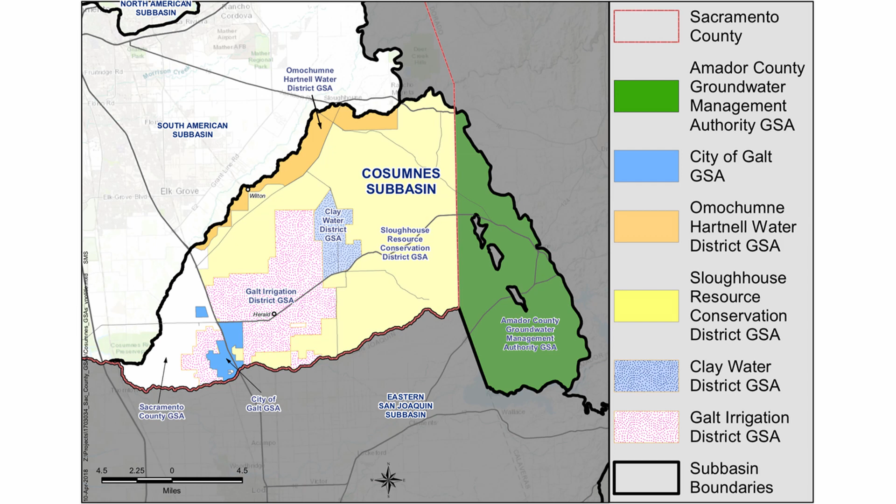All right, well, it's a big topic, and there's some tension in trying not to rely on things like technical jargon and so forth, and at the same time trying to give information that's available and meaningful to a broad-based audience. So I hope we succeeded on this. This is based on some of the preliminary stuff like Tom's interviews and various conversations and so forth.

Talk a little bit about the adaptability of a model once you have one for the future and maintenance and so forth. And then to talk a little bit about the available models and applications for this basin, for the Cosumnes Subbasin.

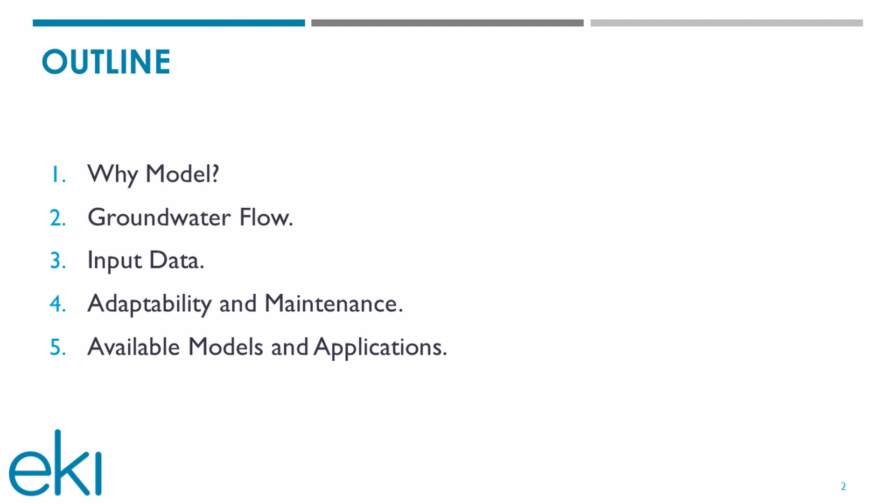So first off, it'd be good to talk about what models can and can't do, because for a lot of people they're just a black box, and they can also be a source of great suspicion. And basically, models are used to quantify groundwater conditions. Okay, and that's a concept that is important for us to get across. The real power in the room is this. It's still this. It's what's in here. But a model is a way to take from what's in here and to put it down and to quantify it in a very unbiased way.

So if you have a mistake up here, your model won't work, no matter what you try to do to it. But it also helps you keep honest, because a lot of times people can be developing a model or running it, and it doesn't give them the answer they want, and so they begin to think it's wrong. And usually it's not that the model's wrong, it's usually the person that's building it that's wrong.

But specifically, what the model does is it quantifies water levels, the level of the water in the aquifers beneath land surface. And because it quantifies the water levels, it also gives us information on the direction of groundwater flow and the rate of that flow. And then finally, with that information, it also tells us how much water is stored and what the changes in that storage are. So you can see they're very useful, because not only can they help you understand what's going on now, but they can also help you make best guess projections of the future.

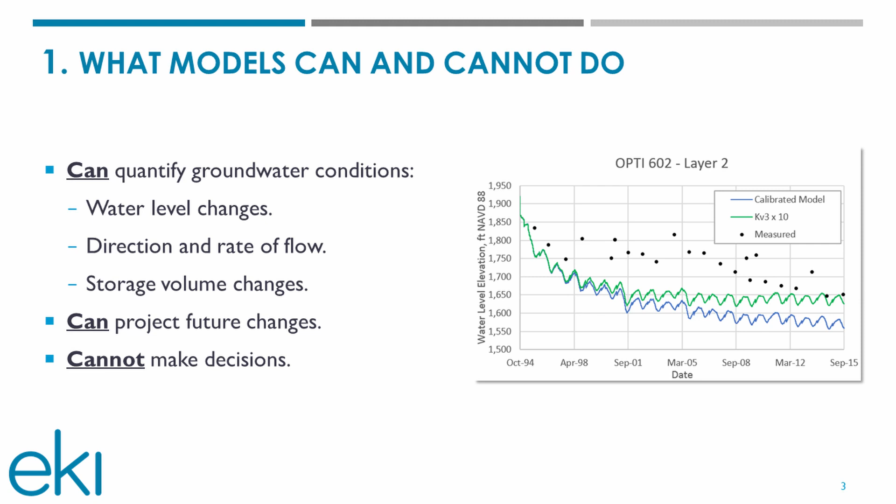Why is a model used or needed for this process, for the groundwater sustainability plan? Well, specifically, we're required to develop quantitative information on current conditions, and we're also required, as part of our planning process, to be able to project what the conditions will be 50 years into the future.

And that projection can be based on things that aren't in our control, like climate change. Or it can be things like projects that any entity wants to develop as a means to develop a more reliable water supply and to look at the effectiveness of the projects over time.

Specifically, we are asked to develop not only information currently, but projected on what they call the cones of depression, and that's where if you have a lot of pumping and you're dewatering the aquifer, you get what looks like an inverted ice cream cone. Or it can be over a much larger area where you have a number of wells pumping, and they're all making their own little ice cream cones, and the open part of the cone starts growing, and then they start connecting, and so it gets even bigger.

So it's always additive. In a groundwater system, anybody who's taking out water, it all becomes additive with everybody else. Nobody is an island to himself. It's also important in terms of the depth of water because it can affect things like the pumping lifts. The depth of water can also affect whether your well, which is basically fixed in space, whether the water level falls beneath the screen in the well, and so forth.

We're also required to develop that same information on current and projected future conditions, what we call a water budget, which is a compilation of inflows and outflows. Just like a bank account, you have your income coming in and your bills going out, and the balance of your checkbook is what you have in storage. And we're required to calculate that for the resource that's beneath the ground and that we can't see. And so that's why you need a model.

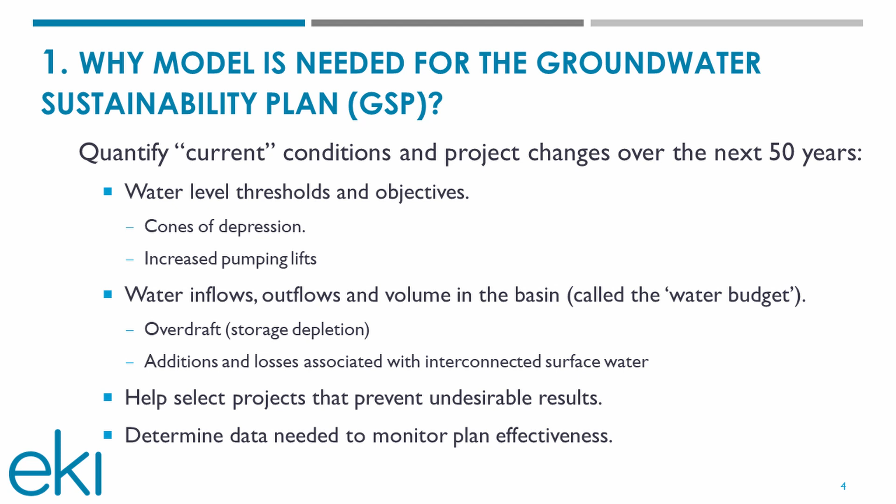And so I have a little video here that Kat and the Water Forum helped me splice together, but it's an introductory video on just the basics of groundwater flow.

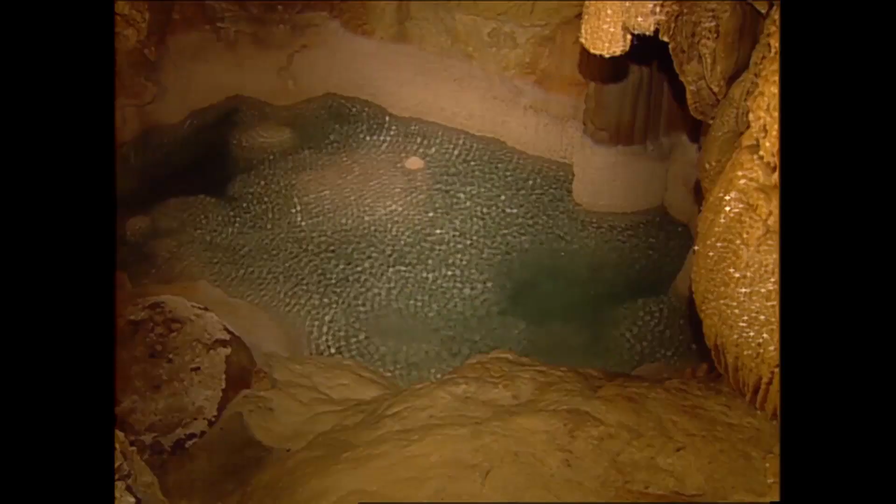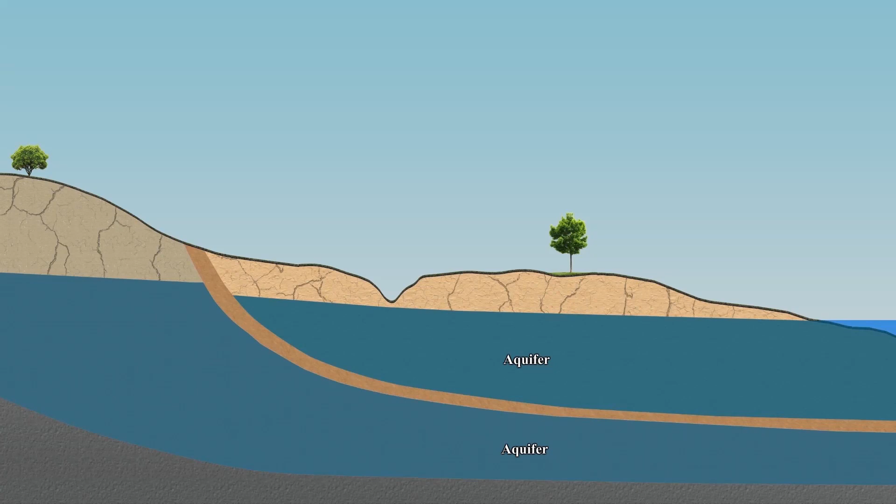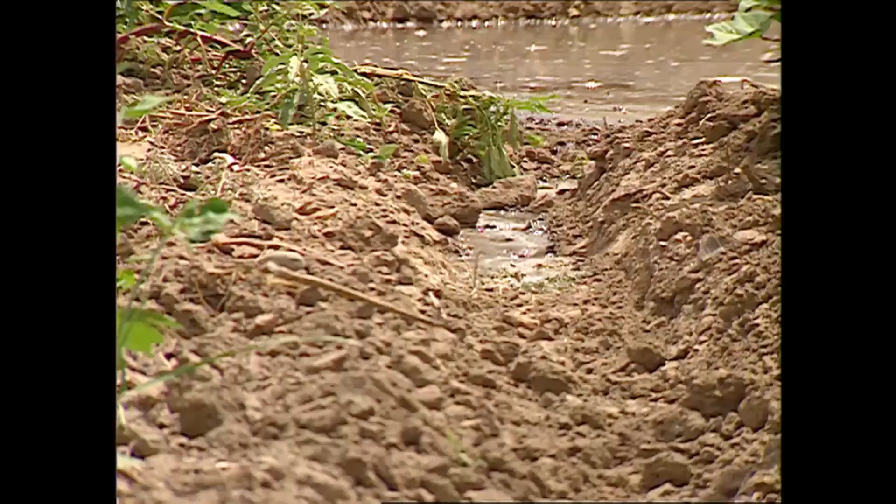Aquifers are rarely underground lakes like you might see in a cave. They are typically rock formations that are mostly solid, but like sponges, they have interconnected fissures and pore spaces that hold water and allow it to move within the formation. An aquifer is best defined as a layer of saturated rock and the water in its pores. Aquifers are formed very slowly over vast periods of time. Water in aquifers comes originally from the surface of the earth. When rain falls, some of the water infiltrates underground and collects in the pore spaces. Water in rivers and lakes can also seep into the subsurface pores. Eventually, some interconnected pore spaces become saturated with water. In other words, they become an aquifer.

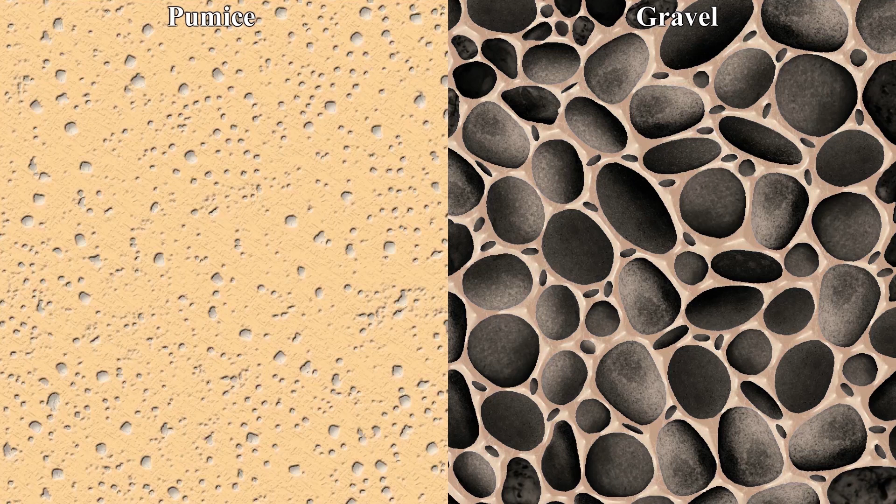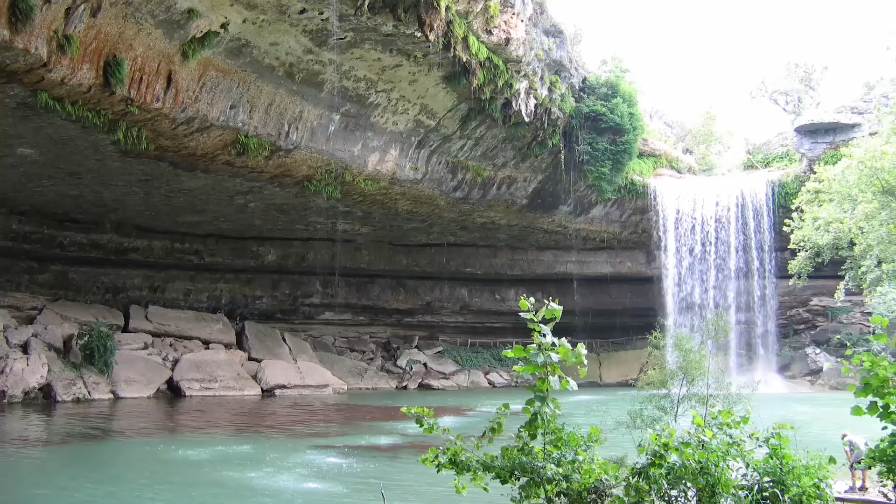The ability of an aquifer to produce water depends on the properties of the aquifer's rock formation. The two most important properties are porosity and permeability. The porosity is a measure of the volume of empty space, or pore spaces, inside the rock. Pore spaces can be openings between grains, fractures in the rock, and even caverns. Porosity represents the volume of water a rock formation can hold. Porosity itself isn't enough to create an aquifer. The areas filled with water must connect with each other so the water can flow from one pore space to another. That connectivity between pores is known as permeability.

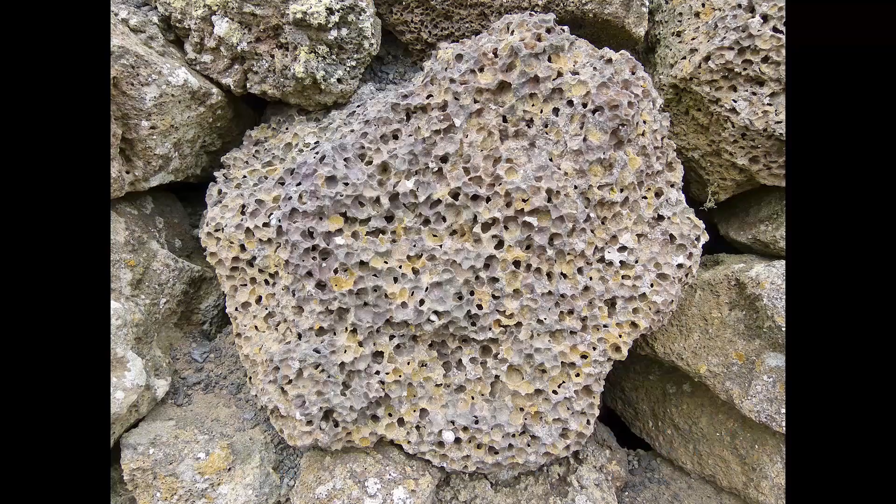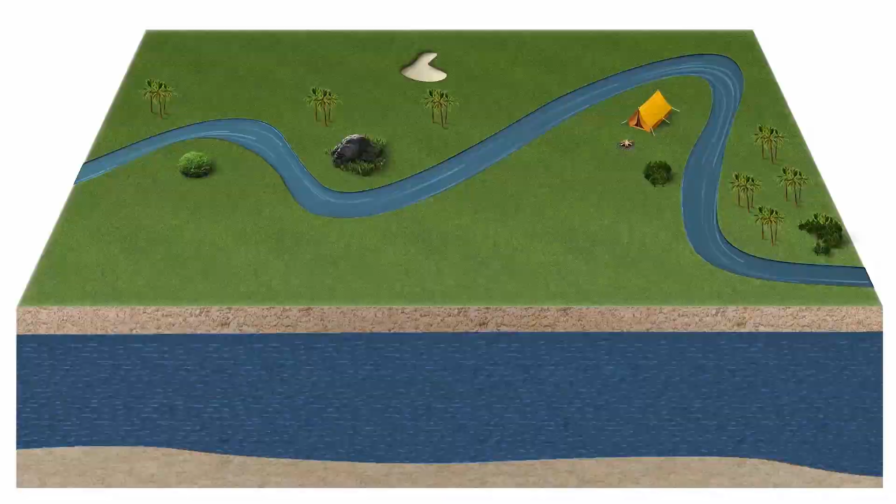Permeability is a measure of how readily water can flow within the rock. Rocks such as pumice and shale can have high porosity, but do not form productive aquifers because the pores within the rock are not connected. The permeability of pumice and shale is low. On the other hand, gravel transmits water quickly because of large connected pore spaces. The permeability of gravel is high. Compared to water movement through rivers or lakes, the rate of movement through an aquifer is slow.

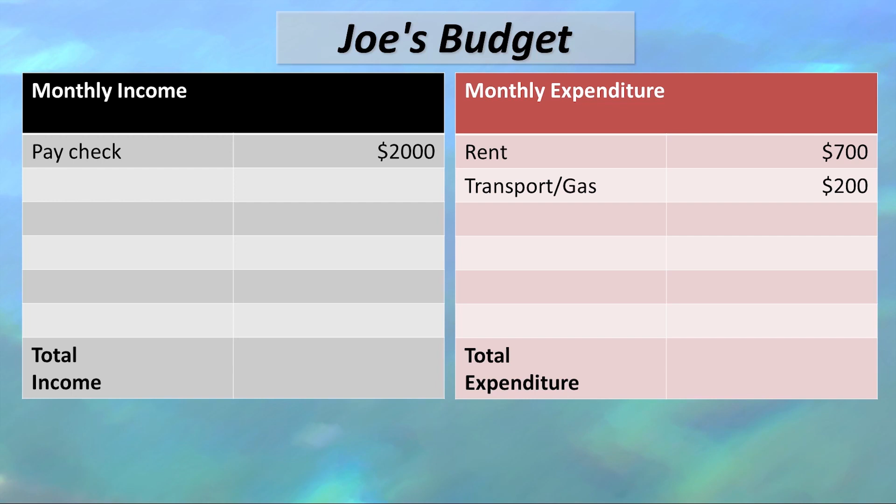Managing groundwater is the same as managing any budget. A household cannot continuously spend more money than it earns. In the same way, an aquifer cannot continuously give more water than it is taking in.

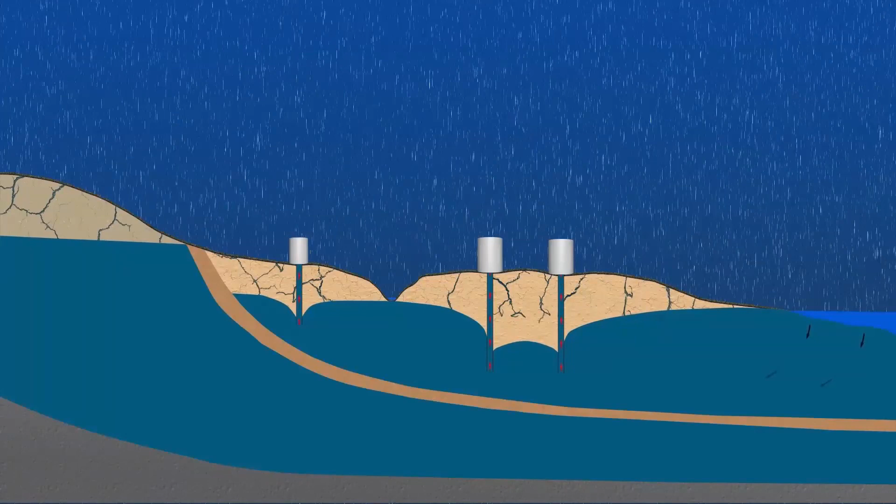Accounting for the groundwater budget requires thinking about the water cycle. The water cycle is the continuous movement of water on, above, and below the surface of the earth. Water that enters an aquifer from the surface is called recharge. Recharge includes rainwater that seeps down through the soil to reach the water table. Only a small portion of total precipitation gets down this far.

Recharge also includes water draining into the aquifer from streams and lakes. Water that enters from another aquifer is called inflow. Inflows and recharge are comparable to a deposit in a bank account. They add to the overall wealth of an aquifer.

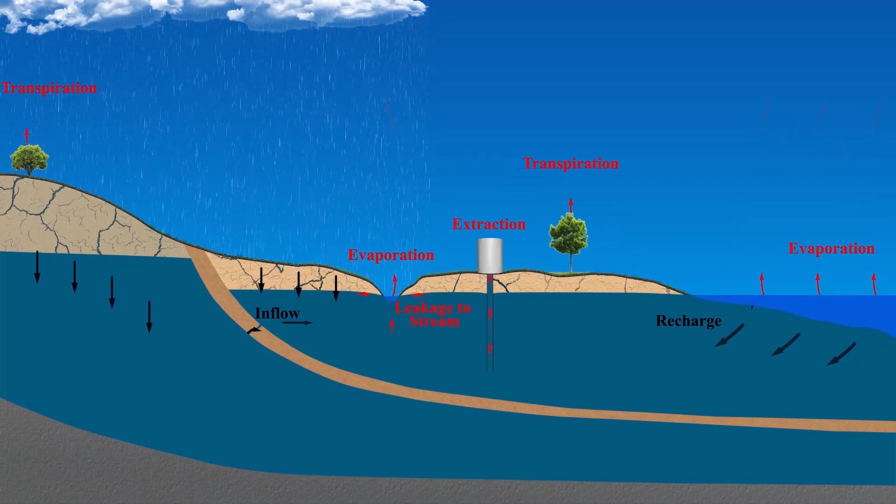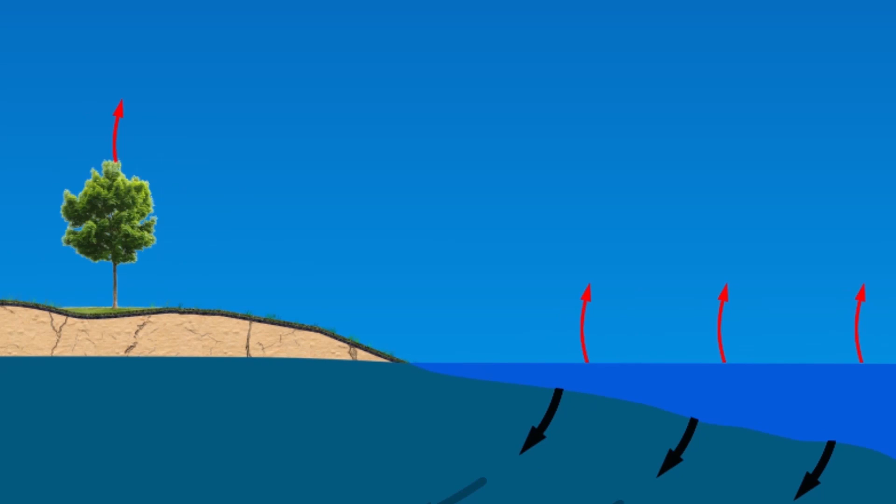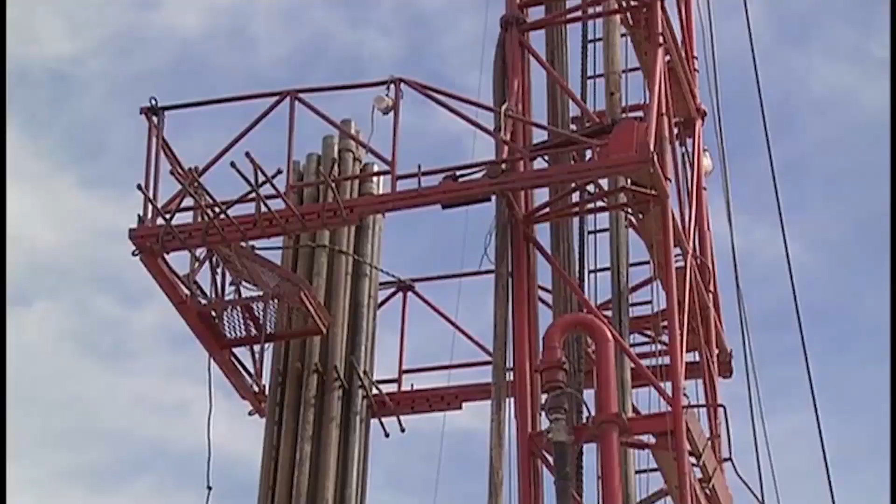Water exiting an aquifer naturally or artificially is called discharge. Examples of naturally occurring discharge are evaporation, groundwater used by plants, springs, leakage into streams or lakes, and leakage from one aquifer to another. The most common discharge from an aquifer by humans is pumping. Discharge is comparable to a withdrawal from a bank account.

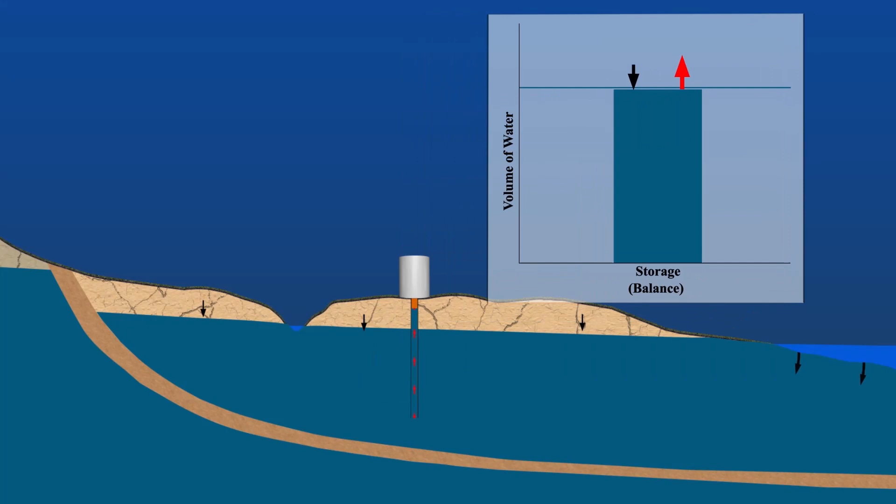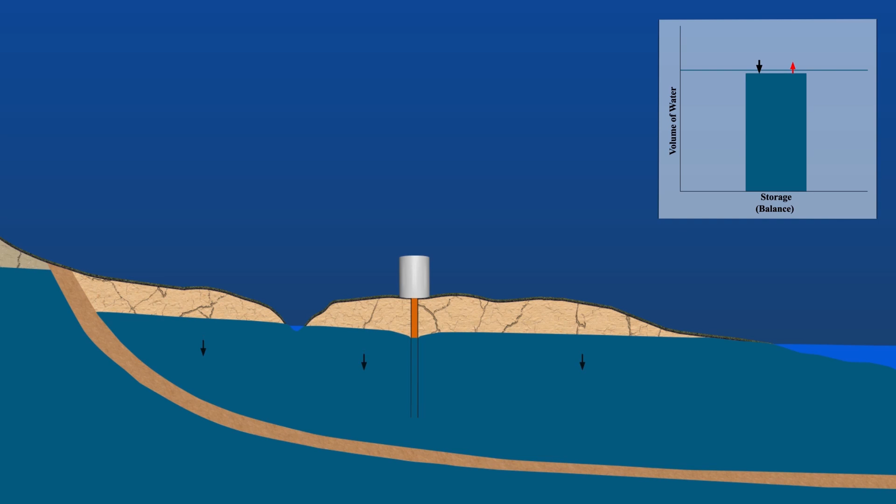The amount of water inside an aquifer is called storage. This is comparable to a balance in a bank account. Anytime we pump water from an aquifer, we are drawing down the water level in the aquifer storage. As long as the amount of inflows can replace what we pump, drawdown is temporary and does not affect water availability. When inflows can't keep up with pumping, we are depleting the aquifer.

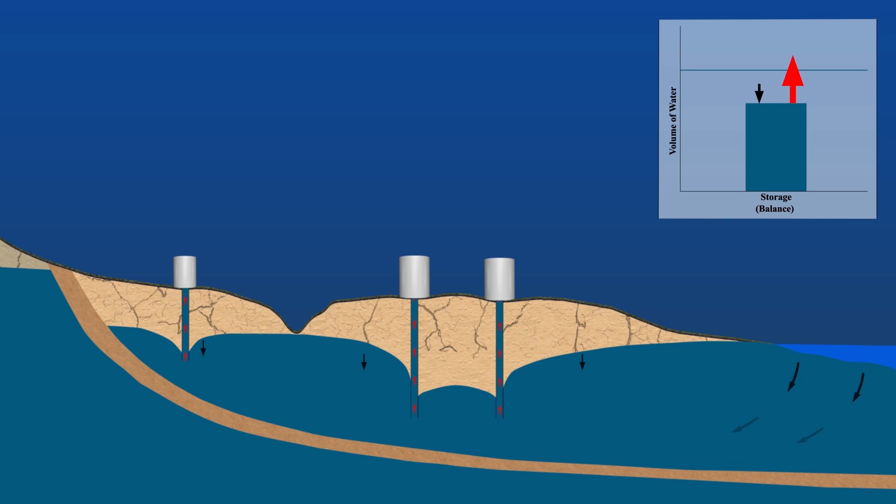Prolonged pumping in excess of inflows reduces the amount of water in the aquifer, and as a result, pumping becomes more difficult and costly, as water must be lifted from increasing depths.

Okay, so that's some of the basics behind groundwater flow and groundwater systems. And one of the things I wanted to talk about first is this whole thing. Sometimes you'll hear them talk about an HCM or a hydrogeological conceptual model, and all that is, it's the understanding that we have up here of what's going on out there. And so if you can think of this as being sort of like the Cosumnes Subbasin, you have all kinds of things that are going on.

First, you have a structure of what your groundwater basin is like, and what I'm talking about is the aquifers. And so, like in this diagram, it's showing that it's not just one big homogeneous or uniform piece of material. There's variability. There's clay beds that don't transmit a lot of water, but they can impede the movement of water between two different water-bearing zones.

You also have things that are going on on the land surface that have an incredible amount of effect on what's going on beneath it in terms of the water use and the water that gets back into the system. You can have surface water, groundwater interactions that occur along creeks and streams and so forth. You have wells that can be pumping from variable depths in different water-bearing zones. And then just the variety of land uses and the amount of activities that go on that consume the groundwater.

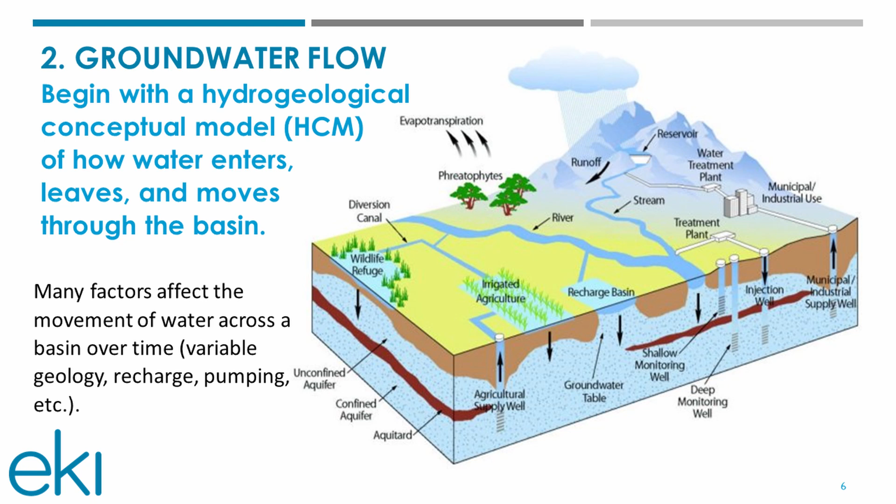One of those concepts is that, you know, it's an aquifer. You can kind of think of it like a sponge. It's not a perfect analogy, but it does have a lot of similarities in that it stores water. We all are familiar with a sponge. If you put it in a bowl of water and you let it absorb to its full capacity, you can pull it up and it'll be draining under gravity.

And that's just like in an aquifer with a water table. It can be draining under gravity if there's a place that the water can go to. And then you get to a point where it doesn't drain anymore, but that doesn't mean it's devoid of water. You can squeeze it and get more water out of it.

And unfortunately, when that happens in basins that have what they call unconsolidated sediments, meaning that they're like sand, silts, clays, and so forth, and under certain other conditions, you can actually have a situation where by lowering the water levels, the burden from the overlying soils and everything that's on the land surface starts to compress those fine-grained clays just like a sponge, and it'll squeeze water out, a lot of water. But unfortunately, the land surface sinks, and that's what they call subsidence, and you can't get it to come back.

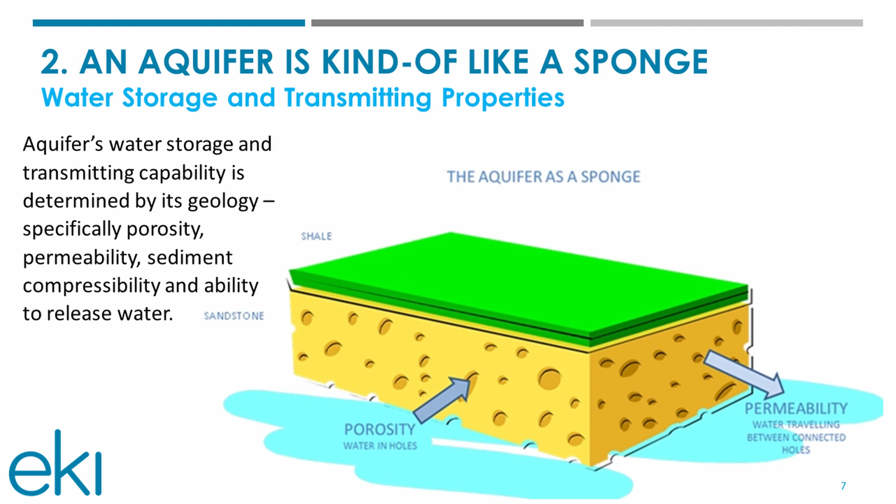Okay? And then finally, the other point that is important, and they did a good job of that in the video, is the relationship between porosity and permeability or hydraulic connectivity. Just because you have a material like a clay that can have a lot of water in it, it doesn't have the same connectivity. It's much more difficult for the water to move along the various paths than the water that would be in like a gravel. Okay, so those are important. So even though you have something that can have a lot of water in it, it doesn't necessarily mean that the water is accessible.

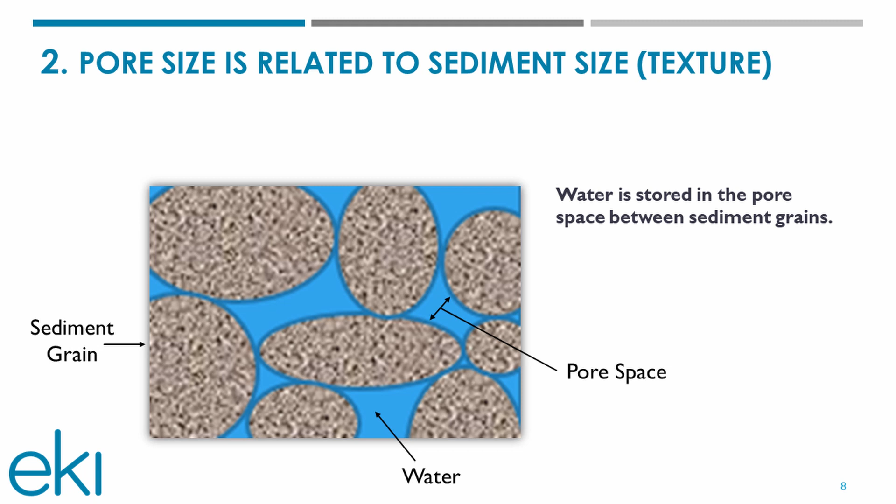And then this is another slide just to emphasize that point, is that what we're really talking about in terms of groundwater movement is the amount of water that is actually in between the individual grains. Whatever those grains represent, whether it's boulders or sand or clay, it's whatever is between those solids. It's the water that's within those pores, and then it's the movement of the water through the pores that results in groundwater flow.

I just had another thought and it escaped me.

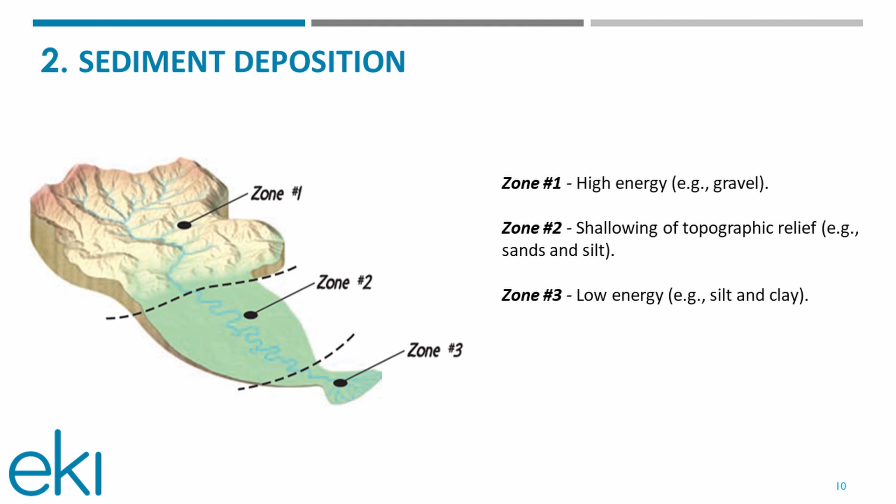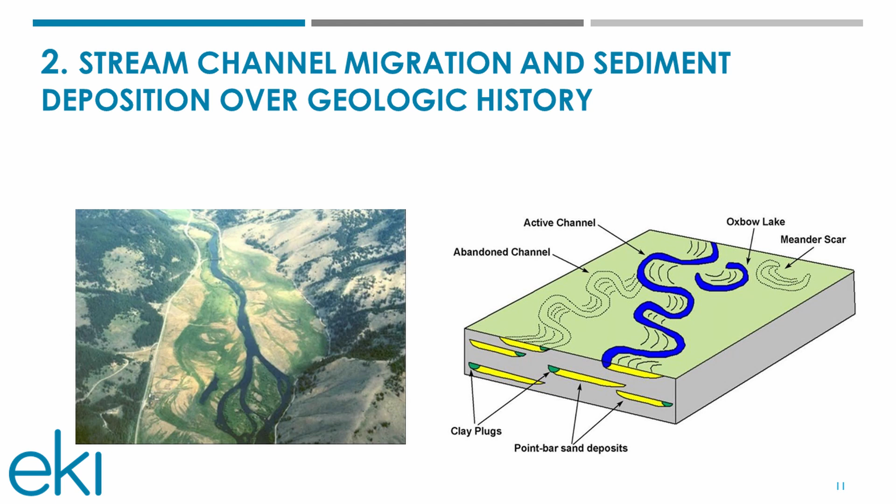This is just a continuation of the concept I was talking about in terms of deposition of sediments. What we're showing here is how over time, when you have these streams meandering, they can also change courses. And you can see the patterns in here of the old stream channels. And it's really important that over time, with depth, you can see that these were old stream channels at earlier points in time. As the stream moves, they start getting the fine-grained deposits laid down beside them. So you get what they call buried stream channels.

And in fact, you can see some of the properties in here where you can still see the green up here, which is probably indicative of the topography being a little bit lower and the water table being a little bit shallower, as opposed to the other areas where you may have higher topography and a deeper water table.

But the real important message in all this is that in dealing with a basin like this, the term I always like to rely on is that they're called messy aquifers. Okay, there's just no rhyme or reason really. It's very difficult to quantify this channel here, this channel there, this depth here, and this depth here. There's just too much going on. There are tools to try to reduce that uncertainty, but it's really difficult to map this out like you would a plumbing system, where you know where the pipes are and where the water's going. This is much more complex.

How would you characterize the Cosumnes Basin? Are we down into that meandering portion of the lower valley? You have almost all of it. So we've got a messy aquifer. Yeah.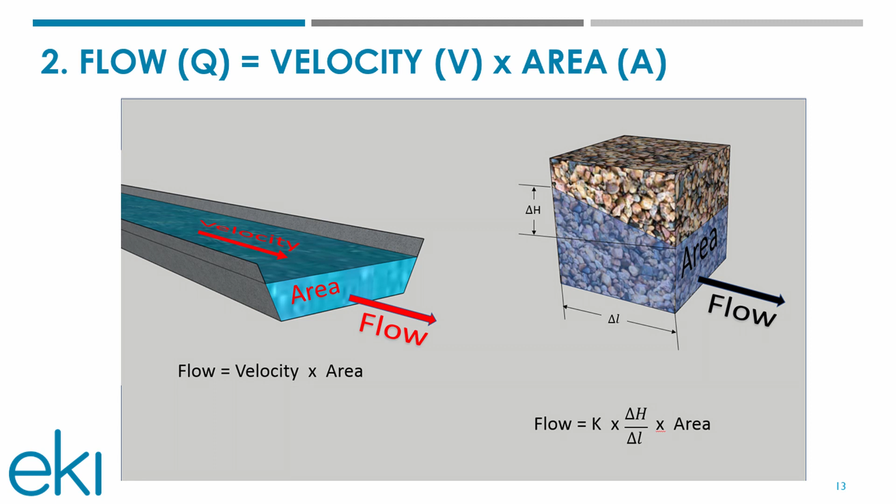And so this is what is driving the flow. This is its ability to transmit the flow, and this is the area of the flow, and it gives you the flow that you're after. And we're going to talk some more about this. In fact, I even have a video here. It might be nerdy, but I liked it because it just shows you that people really do

measure this stuff, and also because we can't see the water flowing underneath us. We can go out and see signs of it sometimes. We have a seepage face along a road cut or along the bank of a river, but we can't see it flowing through the soil. But you can actually see that, oh yeah, it does come through a chunk of soil.

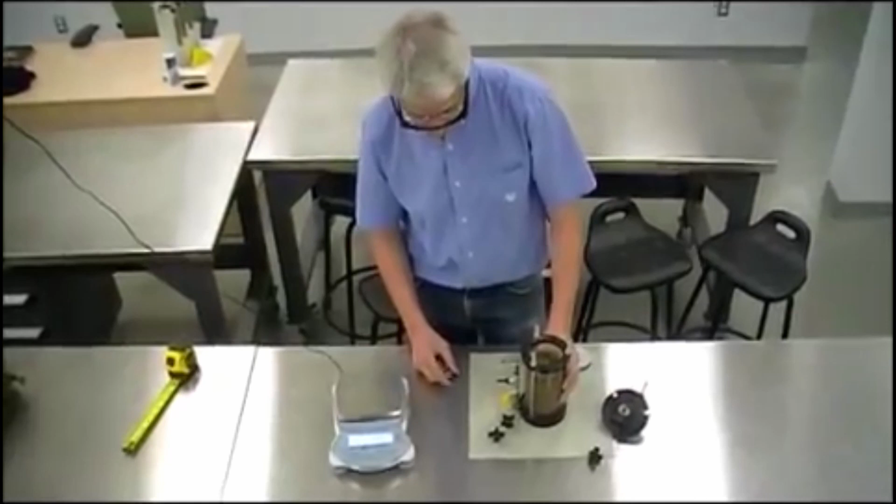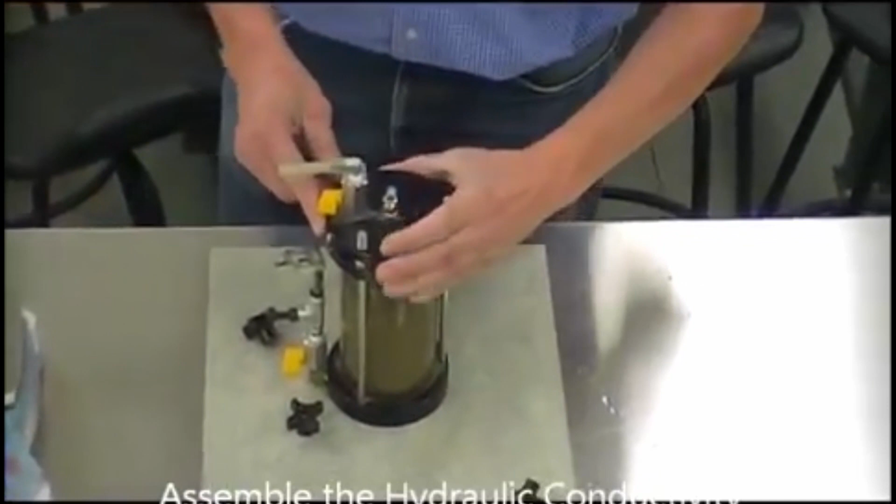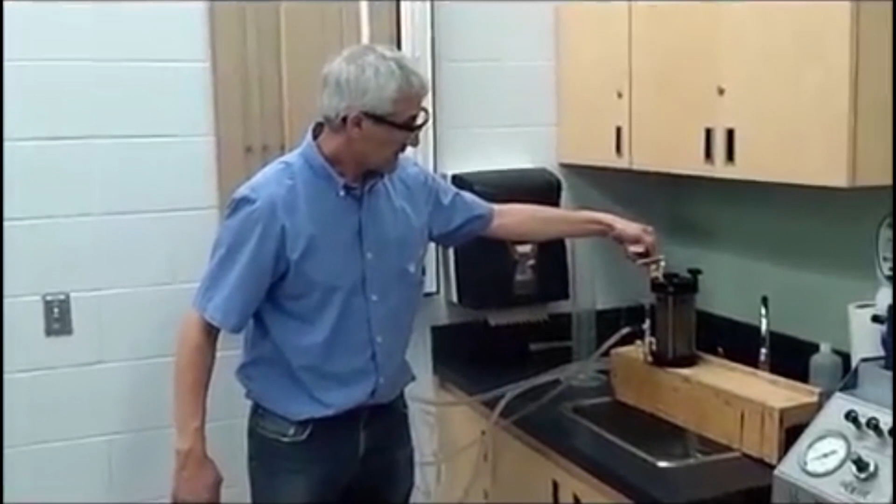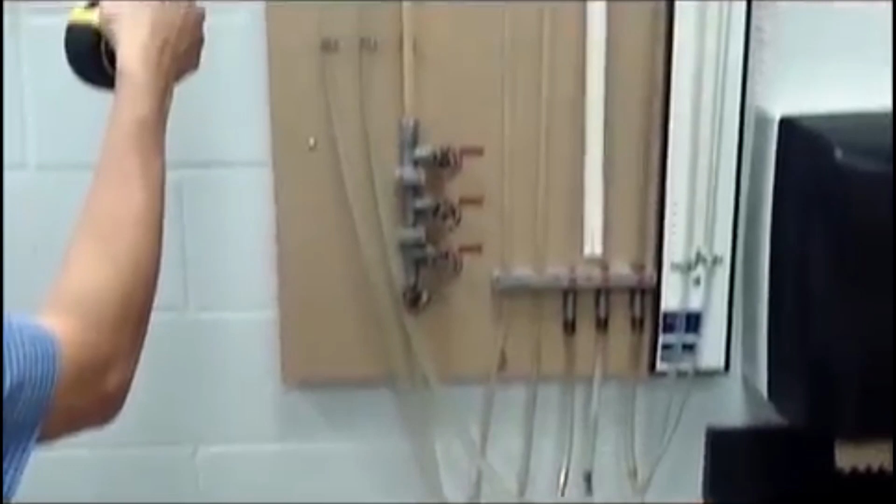Well, in this test, we're going to determine the permeability of the soil, also known as hydraulic conductivity. And for that, we use some soil and the testing equipment. So when you assemble it, that will be the seal that you're relying on. So these wing nuts, there's three of them. Once I open the outlet in here and the inlet, now we have a water circuit that is coming from the inlet here, coming down.

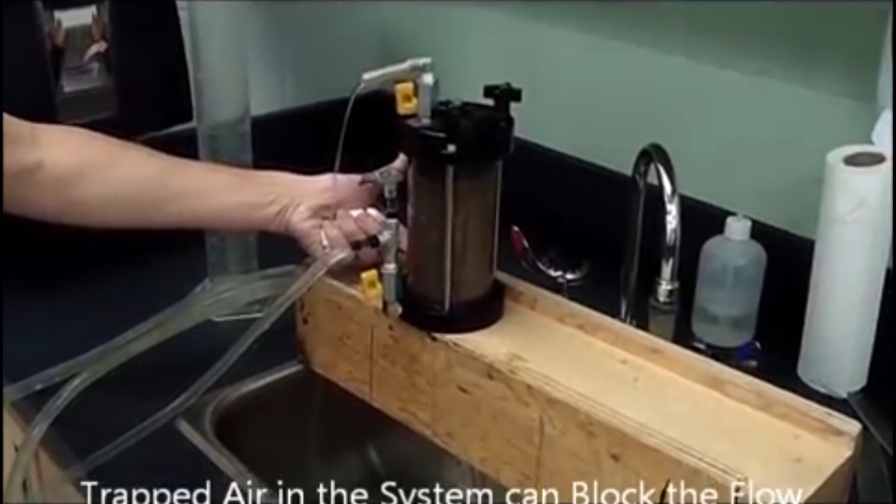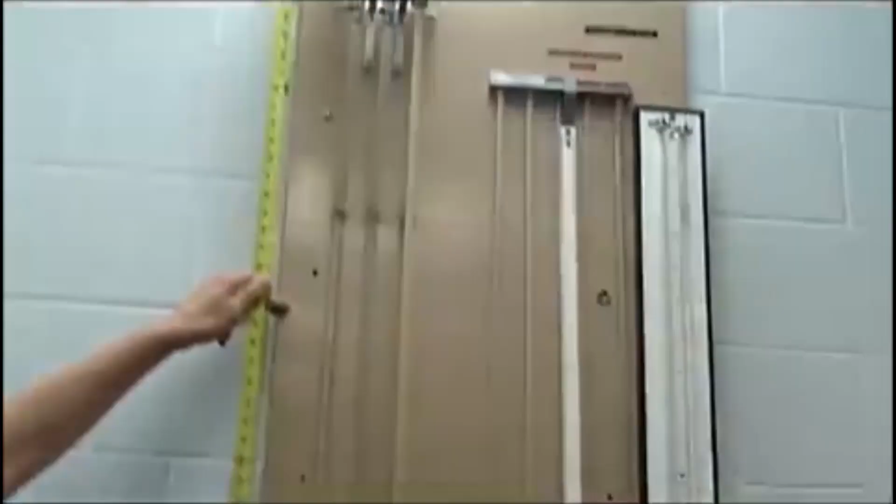It's very important to get rid of all the air in the system. So steady state, we're causing flow to come into the sample from the bottom, flowing upwards. And now we're at a steady state kind of condition. So it's in equilibrium, and all that is involved in measuring the hydraulic conductivity is two things. You have to measure the height difference between this outlet point and the top. So that will be the change in elevation from the top to the bottom of this zero condition, because that one is level right there.

So that's one number, and then the other number that we'll need to measure is the flow rate, or the rate of flow, how much water is coming out of the system per unit of time.

Okay? So that gives you a little feel for what somebody is talking about when they talk about hydraulic conductivity, not only in terms of how it's used in groundwater studies, but it also gives you a visual sense of what it is. And so, one of the things you'll hear almost as much as hydraulic conductivity when people are talking about groundwater is this thing called Darcy's Law. And it's really one of the fundamental principles used in groundwater investigations.

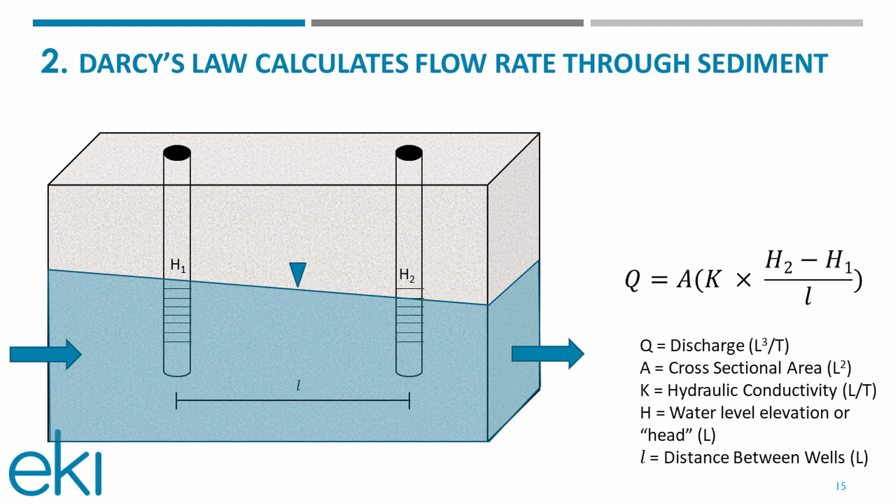Just a comment. Does time become a factor in that any place? Yes, yes. How does that fit into the calculation?

Or at least to structure my talk around the steps of building a model. And in a lot of ways, it's kind of like building a house. I think that's a helpful way of thinking about it, in that the very first thing you have to do is develop that framework. You have an idea of the house that you want to build, but you have to put up the frame, basically. And that is really based on your concept of what the groundwater system is like. And so you build up the frame, and in model speak, that's dealing with the mesh or the grid, and I'll talk more about what that is, but also dealing with what goes on at the boundaries of this house that you're building.

Then the next step is that once you've got your frame up, you want to start putting in your pipes and your wires and so forth. So you're dealing with the electrical and the plumbing, and that's where we specify the properties of the aquifer, the hydraulic conductivities, the variability in the sediment materials, and what that variability means in terms of the variability in water transmitting and water storage properties of the materials.

And then the next step is we begin to attach the exterior to the house, and that's what I think of as starting to develop a lot of the water-related information, like the recharge, the water that replenishes the aquifer, the discharge, the stuff that's coming out of the aquifer, anything that would contribute to the balancing of water inflows and outflows, like surface water flows that are coming in, or in other areas of the state, imported water supplies, recycled water programs, land use. All these things start becoming really important in terms of determining the input that goes into the model and the movement of water. And that's kind of like putting up the exterior of your house.

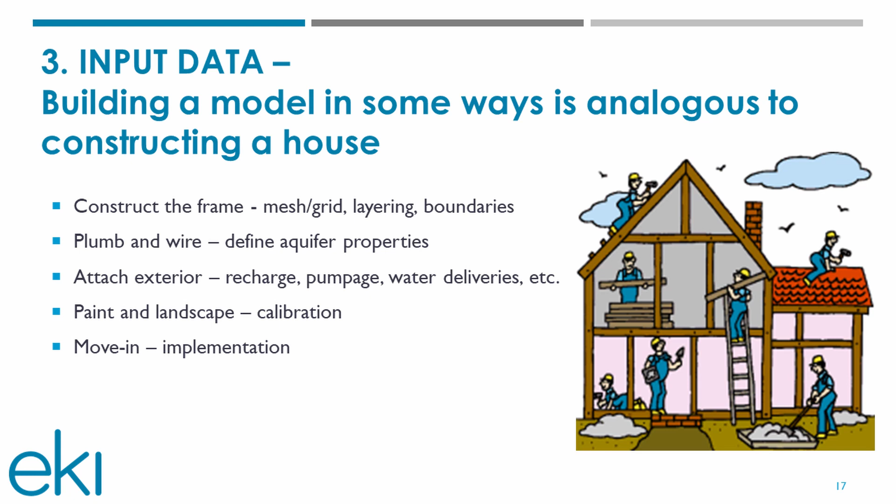And so like I was saying, the very first thing to do is you construct the framework, and that's what you'll hear people talk about as the mesh or the grid. In a very simple sense, you're taking this three-dimensional thing, this volume of sediments, and you're conceptually chopping it up into a bunch of little pieces. It's like all the little triangles that Rodney was talking about, okay? You chop it up into a bunch of pieces, and then you solve that triangle problem that Rodney was talking about over all those pieces.

So it makes it really easy when you want to sum up all the information that all these squares and triangles are giving you. If you want to sum up that information, you can do it really easily along those boundaries that are based on political decisions and so forth.

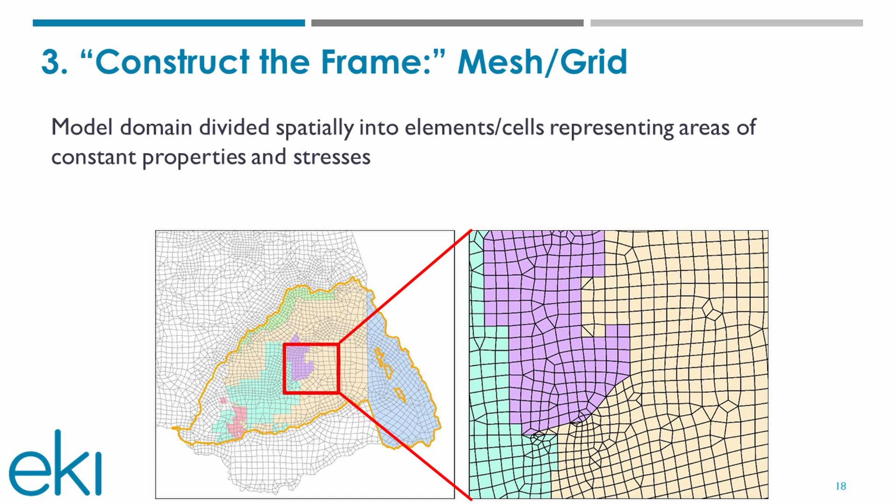And so each of those little units, those little elements, those little triangles and squares, they're an area of the model where it represents things as being all uniform. So that's why there's a balance between how big those squares and triangles are and how small they are. But within each one of them, all the stresses, meaning the recharge, the pumping, the aquifer parameters, whatever values we tell it, they're constant, but they can vary between each other. And so that's how you incorporate the complexity of the real world in it.

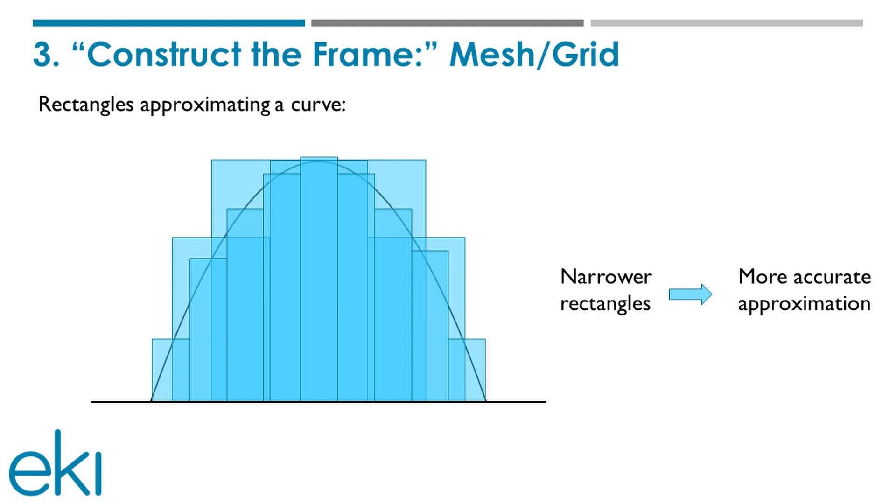Because one of the things we have to remember is that a model is just a representation of the real world, all right? And we can never do that with complete accuracy. It's always an approximation. And so the art of modeling is determining when that approximation is good enough for your purposes, or when it needs to be improved. And so here's just a couple of examples, I've shown these to some of you before, to get your mind thinking about the whole idea of a model and evaluating how it's chopped up.

Say, for example, that you wanted to understand or calculate the area underneath this shape, this curve, okay? You could approximate it, because I can calculate the area of a square or a rectangle easily, right? So you can eyeball it and say, okay, this is about it. This area up here is making up for the area I'm losing here and so forth. And you can calculate it and get an approximation.

But then you can also chop it up smaller. And I think intuitively you begin to see that, yeah, there's still error, there are still areas of error we're trying to compensate for. But these three little rectangles probably do a better job than that one big rectangle. And then you can chop it up again. As you chop it up more and more, you begin to match that line closer and closer. And that's the whole concept behind what they call discretization.

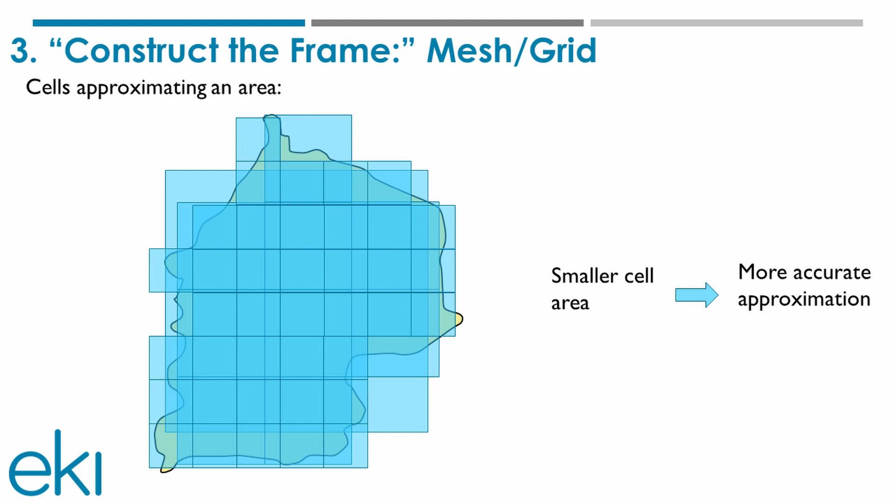So we chop up the model in a map view, over the land surface, so to speak, but we also have to chop it up in the vertical direction. And sometimes you can just chop it up like you did in the map view. You just say, I'm just going to make what they call layers. I'm just going to make all my layers 10 feet, however deep I want to go, and then I'll just pick off what this layer represents, what this layer represents, and so forth. That's one way to do it.

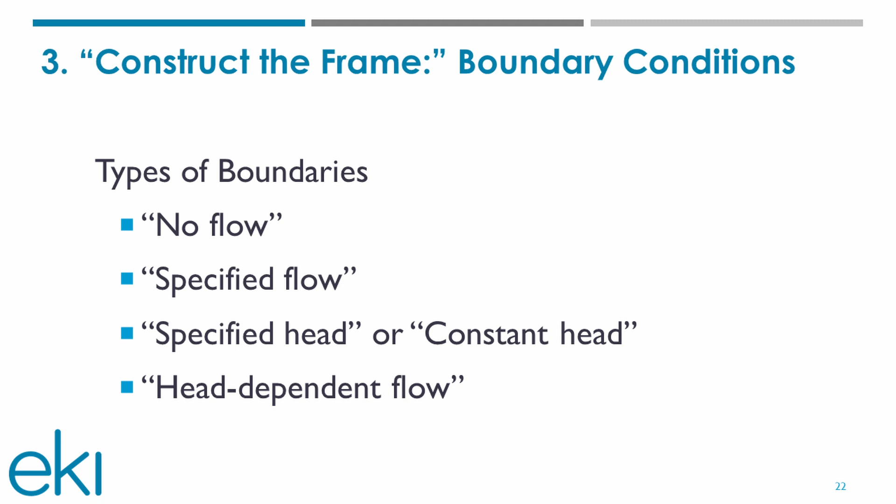This is going to be a pretty long section just talking about boundaries, but the reason is there is a lot of complexity here in this basin. You will probably use, if not all of those types of boundaries, at least three of the four. So I thought it was important to give you a sense for what we're talking about, because these terms are going to be talked about fairly frequently in the future. The types of boundaries are no flow, specified flow, specified head, also called a constant head boundary, and head-dependent flow, and I'm going to explain what those are.

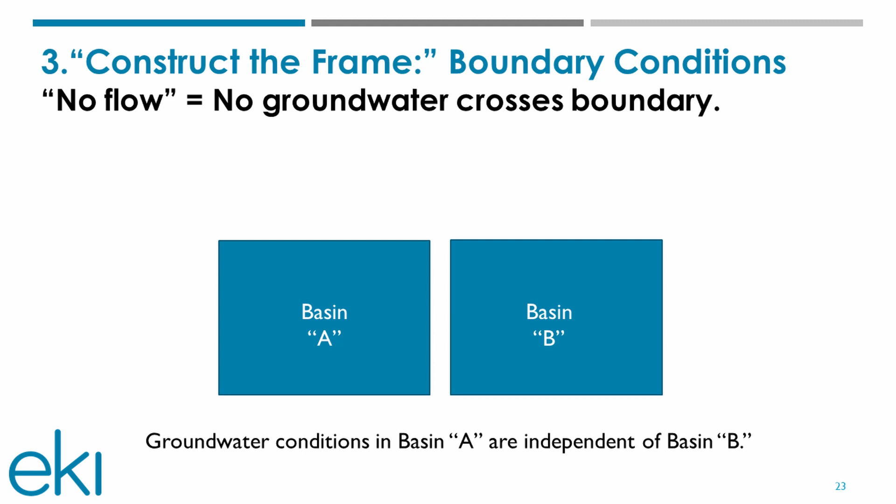Okay. So the no flow is the easy one. Basically, that's like if you have an aquifer that is up against bedrock, water can't exchange between the two. So at this point in space, we just say there's no movement of water across that boundary. And so if you had two basins, like say this is Eastern San Joaquin and this is the Cosumnes, if there's a no flow boundary, what goes on in here doesn't affect what's going on over there. That's not true here. But if that was the situation, that's the purpose of a no-flow boundary. You don't even need to worry about this basin. All you need to worry about is your desert basin surrounded by a mountain. Okay? So that's a no-flow boundary.

And here's an example of how it might apply here in this basin, where here is the concept where you have your sediments that have water in it, your water-bearing materials and so forth, and they butt up against the underlying rock, and you approximate that contact as a no-flow boundary. And here's an example from an actual model grid that includes the Cosumnes Basin, where here's the boundaries of the basin, and where it butts up against the rock formations, you can represent that as a no-flow boundary.

And what that means is that there's not water flowing into the basin through the subsurface, but that doesn't mean that water can't be flowing into the basin on the surface. Okay, it's not cutting off all water, it's just cutting off water that's moving beneath the land surface.

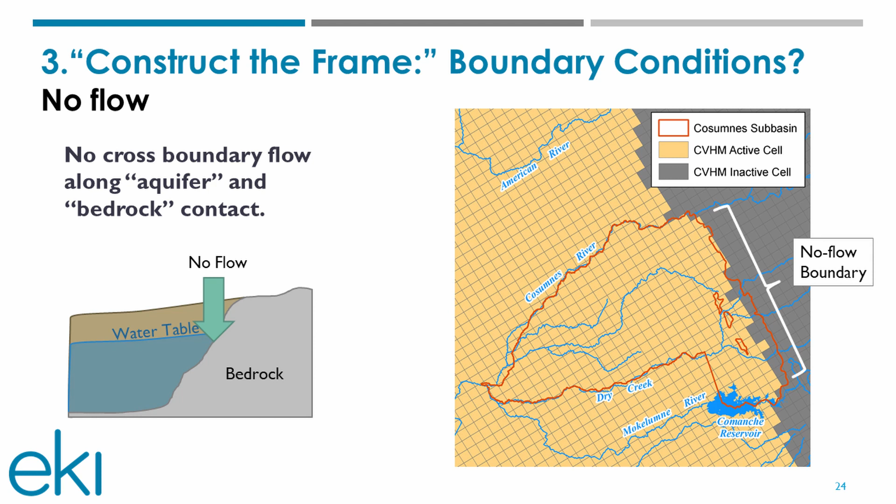So constant head, this is a boundary condition where what we're saying is that the water level is constant. It doesn't change over time, and one of the easiest concepts for that is thinking of if you had an aquifer in contact with the Pacific Ocean. We all know the tides go up and down, but over time it's basically staying about the same elevation, the average. And so it could be represented as a boundary where the water level is constant.

And in this basin, something that might possibly be represented as a constant head boundary, a place where water level is constant, might be the reservoir. We know water levels change with time, but in the long run, relative to what's going on around here, the movement of water either in or out of the reservoir is not going to change the level of the reservoir. And so you could legitimately say, okay, we know what the water level is with the reservoir. We can change that value every month or whatever over time, but during that period of time that we're looking at, we assume that it stays the same.

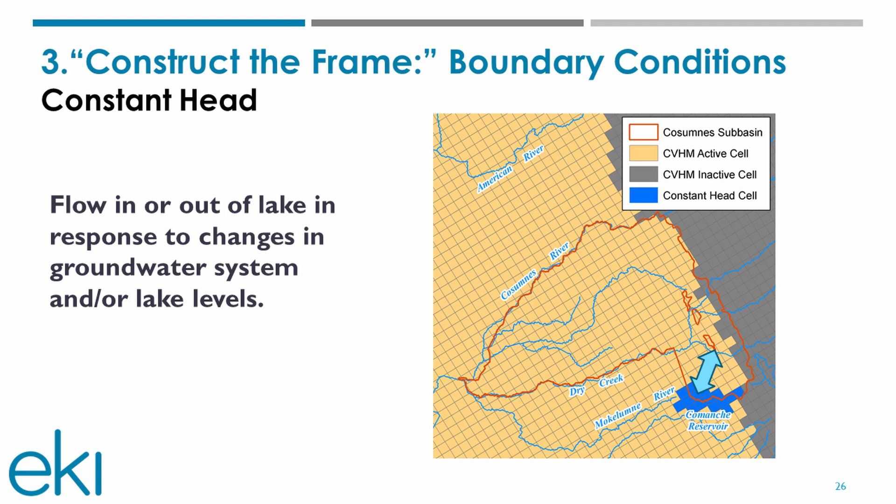And I think that's probably a good example for the reservoir, in that the amount of groundwater that might exchange between the reservoir, say within a month, is not going to change the level of the reservoir. There are other things that are changing the level of the reservoir much more than that. And so that's an example where you might use a constant head boundary in this basin.

The other one that was on that list was specified flow, and all that means is that the flow across the boundary, we have some kind of estimate of it, and so we tell the model what that flow is. We may have good water level data to tell us what that force is that is driving the flow. We may have good information on the hydraulic conductivity of the materials with depth and so forth, and so we can tell it what that flow is. And so the groundwater conditions in Basin A and in Basin B are going to be influenced by that flow that we specify. Okay?

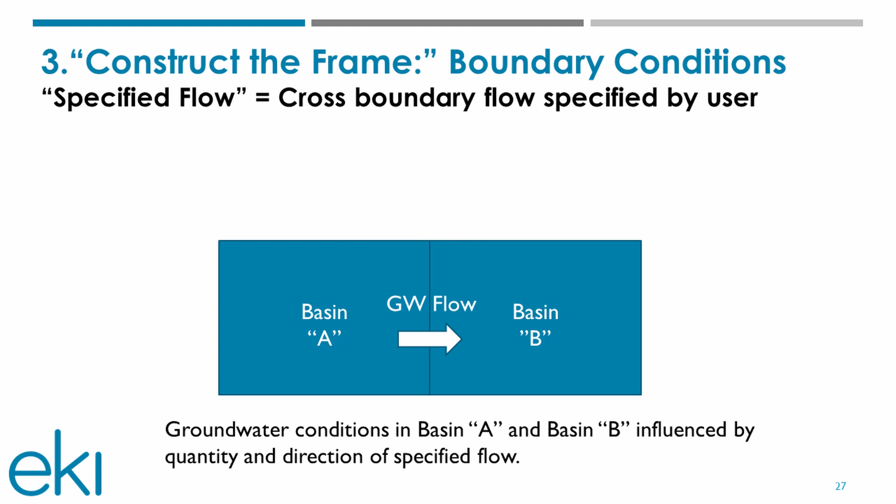Now, it's doubtful that we'll have that kind of information for this basin, but just for an example, remember that diagram I showed with the water levels, and you calculate the flow going across this area of an aquifer system. Well, if you had that data, you could specify that flow along the boundary of the subbasin. And that flow could be either uniform, most likely not.

That's one of the reasons why we wouldn't be able to use a boundary condition like this unless we were doing some simple calculations. But it can vary from east to west, as well as with depth. But this is where you would apply it along a boundary like that. Okay?

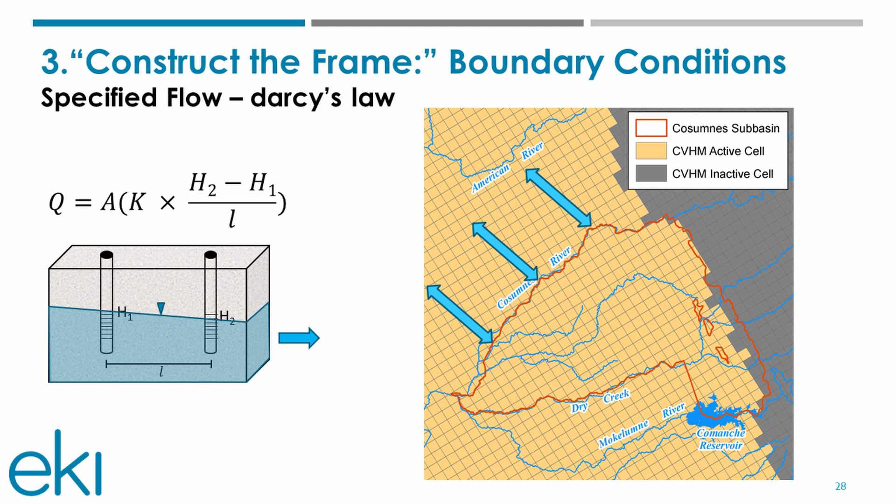Well, John, I heard you say that we probably won't have the data to assess this, but it seems like that's so important to understand it. That's right. And that's why you have a head-dependent flow boundary. Thank you. I was just skipping to the next slide.

I know. And so what this boundary does is it says, say we don't know what the water levels are in Basin A, but we know the water levels in Basin B. Say there's monitoring wells out there. And so the flow between the basins is determined by the water levels that we specify out here in Basin B and what the model calculates is going on in Basin A.

And so what it's doing is it's calculating the flow between the two relative to each other based on what's being calculated within one part of the model and what's being specified as being constant for that period of time externally to the model. And that's why it's called head-dependent flow.

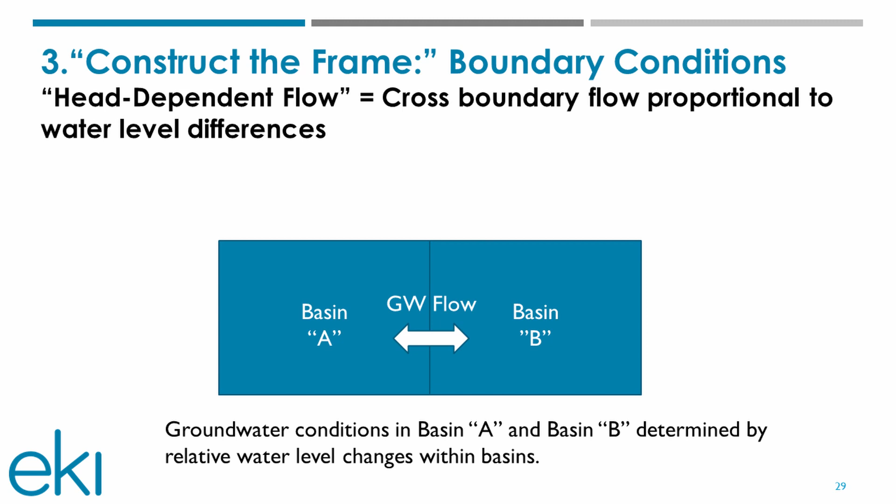And so when you're talking about cross-boundary flows, that flow between the basin and the area outside the basin is going to be proportional to the water levels that you specify outside the basin and the water levels that are calculated inside the basin. And here's an example of where that might work.

In this basin, and this can vary with depth, but just from a map view, say you had wells out here that had water level measurements, some distance. They don't have to be the same distance, they can be variable distances, but you had something that you could hang your hat on. You knew the water level at certain points, or you could have a contour map of this area that tells you what water levels are like out here. Then you could specify those values for this condition here along the model boundary.

And then with the calculations that your model is doing, it'll determine not only the quantity, but also the direction of movement across that boundary based on what goes on inside your basin and what you've specified is going on out here. Okay? So that's one of the ways that you get around the fact that if you can't specify the flux, you can have the model calculate it for you. But in this situation, you have to have those water levels.

Okay? And then that would be further complicated by any inflows from the Cosumnes itself at that particular boundary. Right, and so that's why you may have different conditions in the shallow portions of your model or your groundwater system relative to what goes on at deeper depths.

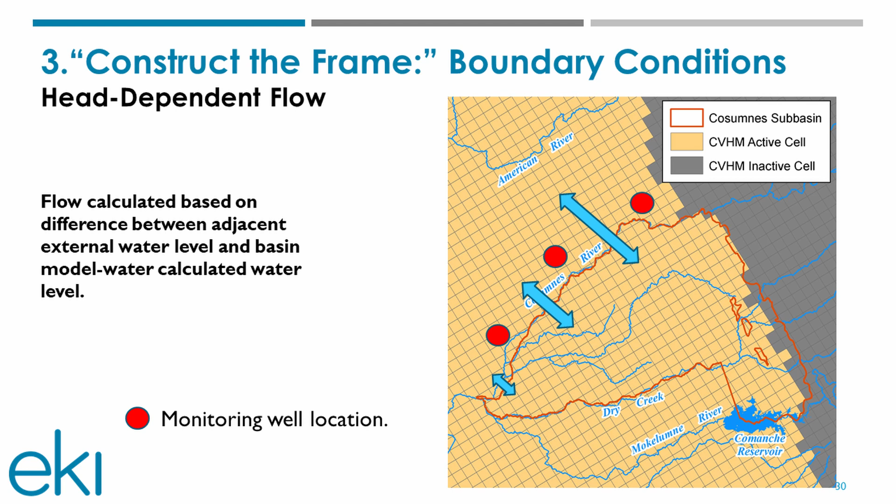Okay, so the tighter the grid, the better. If that's what you need. And in fact, that's one of the things we've talked about, how when you're dealing with these boundaries where there's rivers, you want to have a tight grid. When I was showing earlier, remember in the vertical, we chopped it up tighter? That's the reason, because along these boundaries, you want a tight grid in the shallowest part where that exchange is going on. As you get deeper, it's not as important. So have a more complex model in the areas of sensitivity and use your money there, and then have an economy of scale where it is less sensitive or less important. Right.

And important to this basin is the exchange of water between groundwater and surface water, and that's basically a special type of head-dependent boundary. We talked about the head-dependent boundary earlier for the movement of groundwater, but here we're dealing with the movement of water that's in a channel, surface water, and how that is exchanged with the underlying groundwater.

And this is a special kind of head-dependent boundary where you can specify what that water level in the river is, or the stream, or the canal, or whatever it is you're interested in. And you can specify how that water level changes over time, and depending on what you're modeling and the objectives of your modeling, you can change the water level from yearly to monthly to daily to hours to seconds to whatever it is that you're trying to relate to the problem that you're

trying to solve. But you can specify that value as being the specified water level or the specified head, and then the groundwater model is going to calculate the movement of water between the two based on what happens in the aquifer. Okay, so it's just a special version of a head-dependent flow boundary, and that most definitely will be used in this basin.

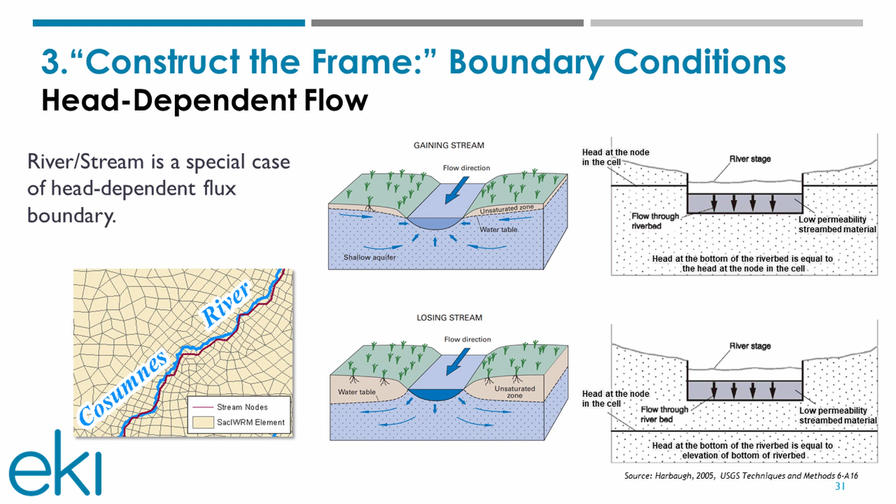I mean, somebody could come in here just cold turkey and say, okay, well, this is a river. I'm going to assume that 50% of the water goes this way, and 50% of the water goes this way. And so this boundary, vertically, is a no-flow boundary. And we'll specify half the flow going here and half the flow going there. Now I'm being ludicrous, facetious here, but that's one way somebody would look at it if they didn't know anything else.

But the reality is that a lot of times, especially in these kind of basins, where they've drawn the boundary of a basin based on something like a river and not on the physical boundaries of the aquifer system, you're going to have uncertain boundaries. And so these are some of the techniques that they use to deal with uncertain boundaries. And some of this stuff you've seen before. This is a map showing the model that was developed for the eastern San Joaquin.

And one of the ways you deal with uncertainty in boundaries is that you build your model for an area that's bigger than your area of interest. And so this is where I want to focus, this is where I want to have really good output from my model. And I want to know what's going on with the boundaries. And so I can extend the model; in this situation we're extending it to the rivers. And I don't need the same level of detail in here. I just need enough in here that'll do a reasonable job of the model calculating what goes on across here.

Okay? And so that's an example of where they'll build a model and they'll extend the boundaries farther away from the basin, when this is really the focus of your effort. So that's one approach to deal with uncertain boundaries. So if we don't have enough wells, or we don't have wells a sufficient distance here, one of the things that you could do, like they've done, is extend your model. And so, theoretically, we could do the same thing, extend it down here, if we decided to do that.

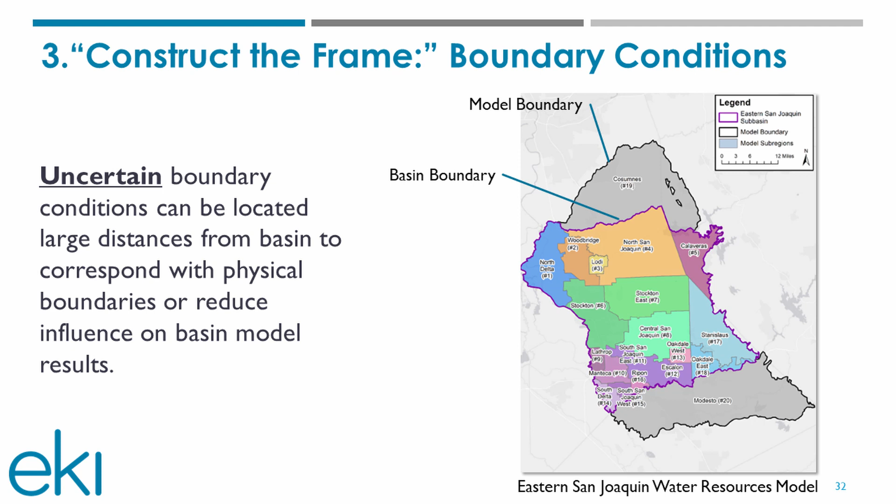Another technique is what we've talked about before, what's called a linked or nested model. What you're doing is you take the information from other models that represent much larger areas, and you take what that model tells you at the boundaries of whatever your model is. It could be just the basin that you're interested in, or it could be the basin including areas outside of it, like I showed you previously, where you model a bigger area than your area of interest. But what you do is you use this larger model.

You take the output from that model, which is either the water levels that the model calculates, because it's going to give you water levels for the entire area here. So you can take the water levels that the model calculates for that boundary and for the depths, and you can specify them on a smaller model that you chop up really finely, and you put in more fine data that you've collected for your own purposes. But you use the larger model to specify the conditions along the edges of your model.

And you can specify the flows. So we can specify water levels, or we can specify the flows that the larger scale model is calculating in all the directions.

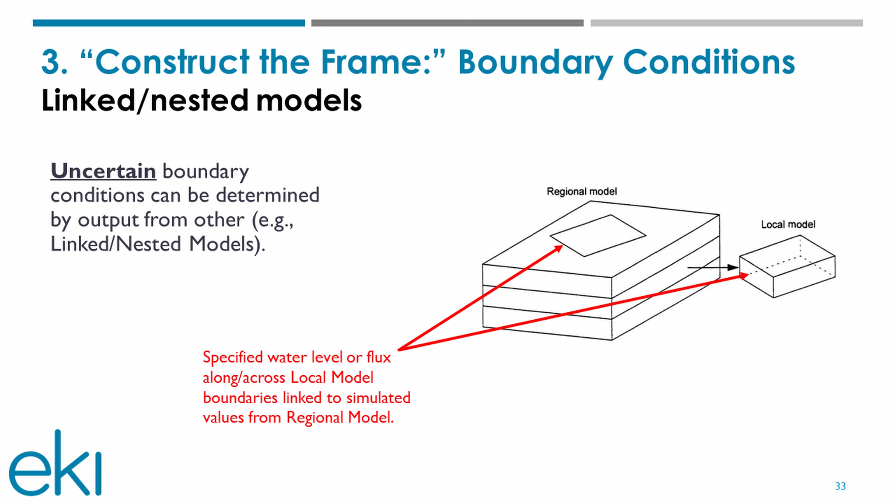And we can analyze that real detailed information at this level, but we can incorporate what's going on along the bottom of the model by using this much larger model. And it would have been too cumbersome to develop that same level of detail for an area that's much larger. So there's an efficiency there. But this is what they call linked or nested models.

And then finally, we talked a lot about the boundary conditions, and the fact that we all recognize that we're trying to do an analysis in this basin, they're doing analyses to the north, analyses to the south, and they're using different models and so forth. And there's a need to make sure that we're all saying basically the same thing. I mean, DWR requires that. But what does that mean? Consistency across basin boundaries. Well, this is my opinion.

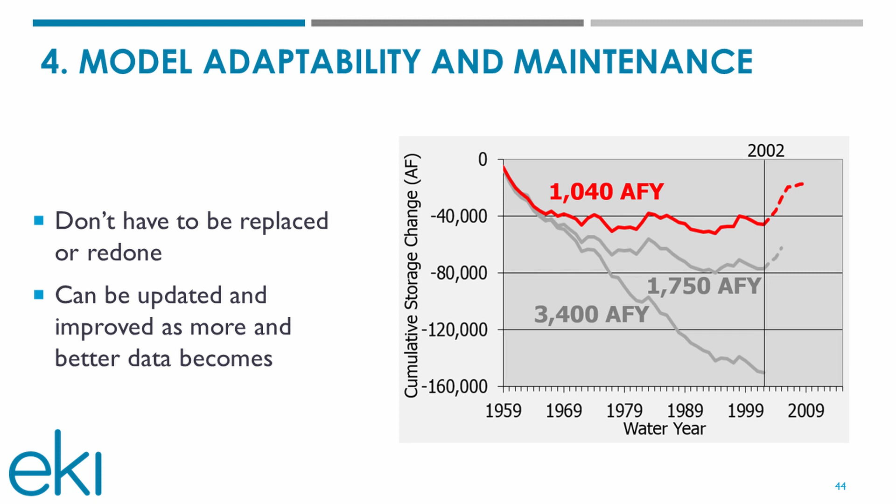So this is summarizing some of the things that we've already said, but in terms of model adaptability and maintenance, the level of effort in updating a model in the future really depends on the quality of not only the information we have now, but what we expect to have in the future. And then also it can change if the question you're asking changes. For example, you may be looking at just a basin-wide water budget right now, but there may be a certain part of the basin where you want a better understanding of the budget. That's going to affect the level of effort you may want to put into upgrading a model and the way it evolves over time.

Another point that I wanted to get across, which we were talking about a little bit previously, was the whole issue of model maintenance, because the models are fairly adaptable. With model maintenance, there are some principles, at least that I've observed, that make it a more efficient process. And one of them is, like I mentioned, consensus among the stakeholders.

It's a heck of a lot easier to develop a model and use a model when everybody has confidence in it. It doesn't work when you have one group over here complaining about this. And then in the extreme, you have competing models. You have different groups creating their own models, and that's not economically efficient. What's best is to go through a process where people agree upon what they know, and they agree on what they don't know, and they are comfortable with the level and accuracy of the information that they're getting.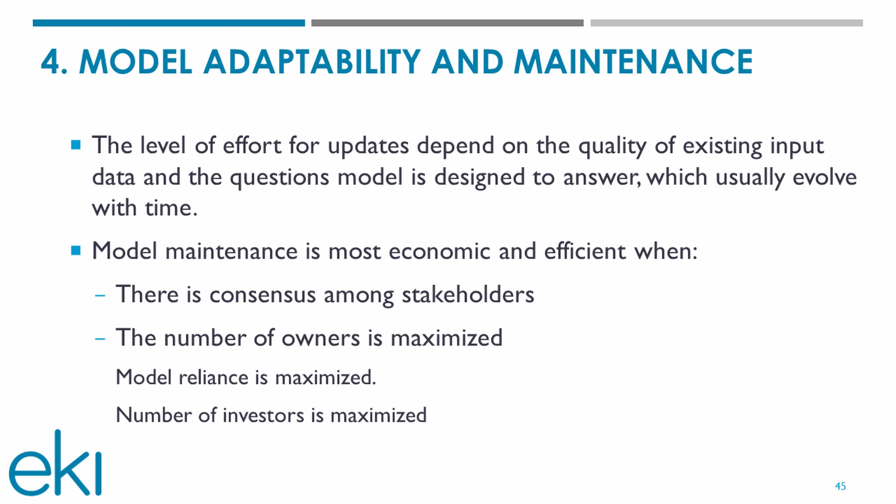Okay, and now this is the last section, and I think this can go pretty fast. This gets to that whole thing of nomenclature, because you'll hear people talk about models and platforms and so forth. I wanted to just clarify that, when somebody asks the question, which model do we use? Well, there are different types of models.

And one of the great examples of it that I can think of is, I don't know if you've experienced it, but gone down to Sausalito. I don't even know if it's still there, but the Bay Delta model that's down there, it's a physical model. It's huge, in this huge airport hangar. And to be able to go there and watch them, this was like 25 years ago or so, but it was just so cool because they have all these little probes all over the place, and they're modeling the movement of salt water through these surface waters and bays and so forth, and it's a physical model.

And they're doing the same thing that people now are using these really sophisticated computer models to do, but they did it with a physical model. I'm not advocating you do that for this basin, but it's a model.

But then there's mathematical models, and that's what we're talking about. And within mathematical models, there are things that are analytical. It's where you can actually solve it. It's simple enough that you can solve the math to come up with an equation to come up with your answer. An example of that, if you've heard of it in the groundwater industry, is an aquifer test using the Theis equation. They make some simplifications, and they're able to come up with essentially an analytical solution. And then there's numerical ones that basically are using the power of a computer to solve the equation.

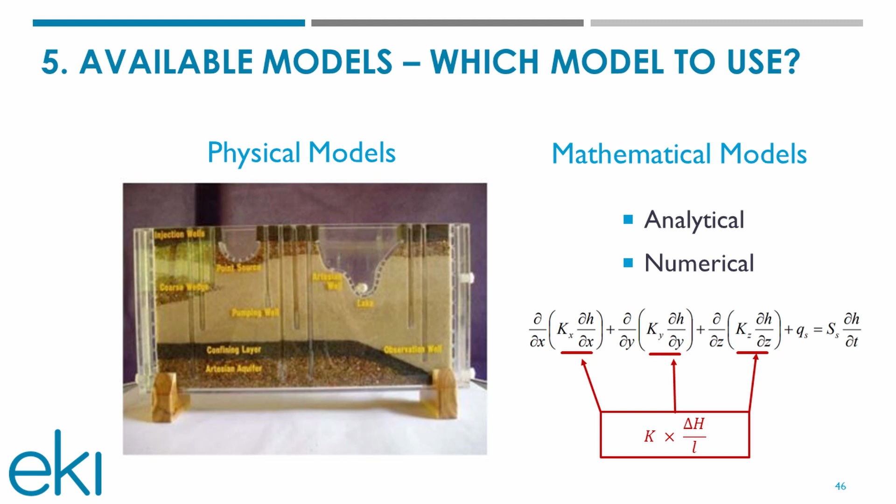And so that's the issue when people talk about platforms. There's not just one computer program to solve that three-dimensional equation, that model. And the most common platforms, especially in SGMA, are these two. There's MODFLOW, which is the USGS's. The first version of MODFLOW came out in like 1986. And the USGS has been supporting it, improving it, expanding on it ever since. In my opinion, they do a really good job of supporting it and developing new tools and so forth that are free, that people can use.

Then there's this model, which is a code of similar age, but it wasn't in this form, and it wasn't publicly available until fairly recently. It's the Integrated Water Flow Model, and this is the one that DWR, or Department of Water Resources, is supporting.

They're both free. They're both freely available, and they both meet all the requirements of SGMA. So when you build your model, you're going to want to use either USGS MODFLOW or you're going to want to use IWFM. And that doesn't mean you can't use something else, but those are the easiest ones because DWR is familiar with them and so forth. And they're doing the same thing, slightly different ways, but they're doing basically the same thing. They're solving that same equation.

Real quick question, nerdy, but has anybody independently looked at the correlation between the two models? Do they track? Do they produce very, very similar results? Yeah, they do it by comparing something that we know, like a simplified analytical model where we know the numbers exactly. They do it by comparing similar applications. There's all different kinds of ways that they tested it. Generally accepted is that either model is fine. Yeah, that's one of the reasons why DWR accepts either one.

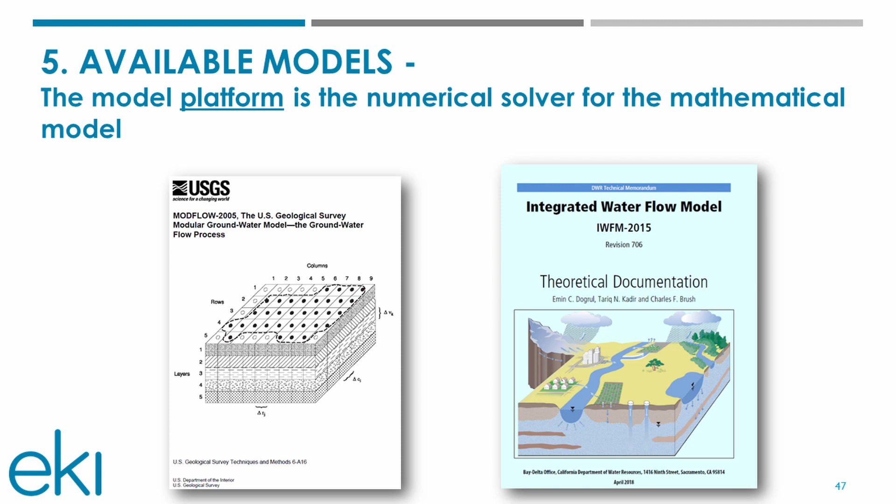And there's a list of requirements. In fact, I have a slide for it later of what DWR is looking for in terms of what you do for a model. Now the applications: your model is the equation, your platform is whatever computer code you use to solve that equation, then your application is the basin that you use that platform to create a model. And there are a number of existing applications that cover this basin. They all vary in the areas that they represent, but this is just a list.

There's the Central Valley Groundwater Surface Water Simulation Model. That's a model of the entire Central Valley, and I have a picture of that later that I can show you. That uses the IWFM code. There's the Central Valley Hydrologic Model. That's a model of the exact same area, the entire Central Valley, but it uses MODFLOW, the other platform. There's the Eastern San Joaquin Water Resources Model. That's the one we looked at earlier where it does include the Cosumnes Basin. The northern boundary is the Cosumnes River.

They included it in the model, but it's not at the level of accuracy or detail that you're going to need for what you're doing, but it does cover your area. So one option could be you grab that model and you improve it, if that's what you wanted to do. I wouldn't recommend it for other reasons, but that's an option. It covers your area. There's the Sacramento Area Integrated Water Resource Model, the SAC IWRM. It's actively being updated right now, and they're calling it COSANA. That's the Cosumnes, South American, North American model.

And I have a picture of that here in a second that shows you the expanse of that, but it includes this subbasin. And then finally, there's the Sacramento Valley Groundwater Surface Water Simulation Model. It covers the Sacramento Valley, which includes this basin. But the nice thing about that model is that they developed it specifically to do a good job of understanding surface water-groundwater interactions, primarily how that relates to groundwater and surface water transfers, most of which are north of here. They were really looking at representing what goes on between the surface water and the groundwater. So it's something that can be considered.

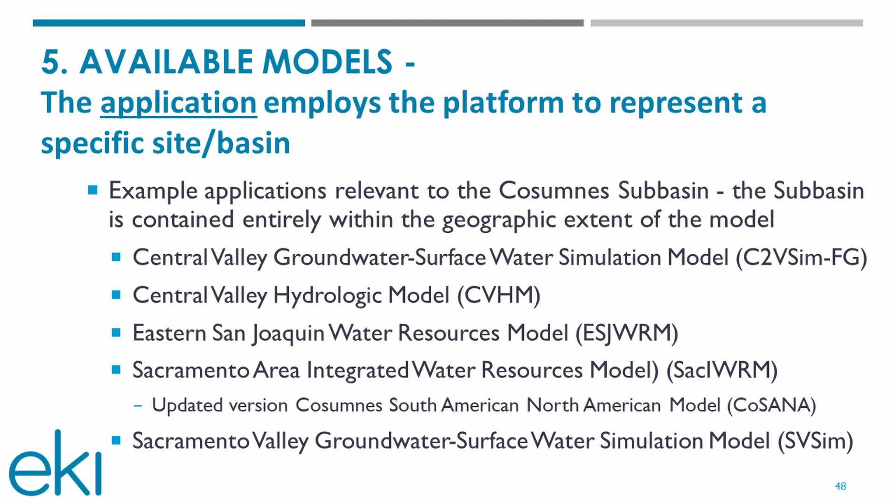John, I just wanted to get something clear. The difference between these applications relates to the numbers of layers, the size or the shapes of the grids. Anything else that differentiates? Yeah, the level of detail in the input, how they distributed aquifer parameters. They wouldn't all use the same aquifer parameters?

No. I mean, like the Central Valley hydrologic model did a texture-based approach. Like we were talking about, that's how they distributed hydraulic conductivity. They didn't do that same approach for the C2VSim. Doesn't mean one's better than the other, because it really depends on what question you're trying to answer. But no, there is no consistency, like everybody did the exact same thing.

I don't understand what you just said. Could you clarify that a little? In terms of the texture-based approach, the aquifer parameters, seems like they would all be similar. Well, I spent some time earlier on that map from the San Joaquin Valley that showed distributions of sands and silts. Remember how I said you would have the high conductivities in the sands and the low conductivities in the clay? That's one way to distribute hydraulic conductivity over an entire model area.

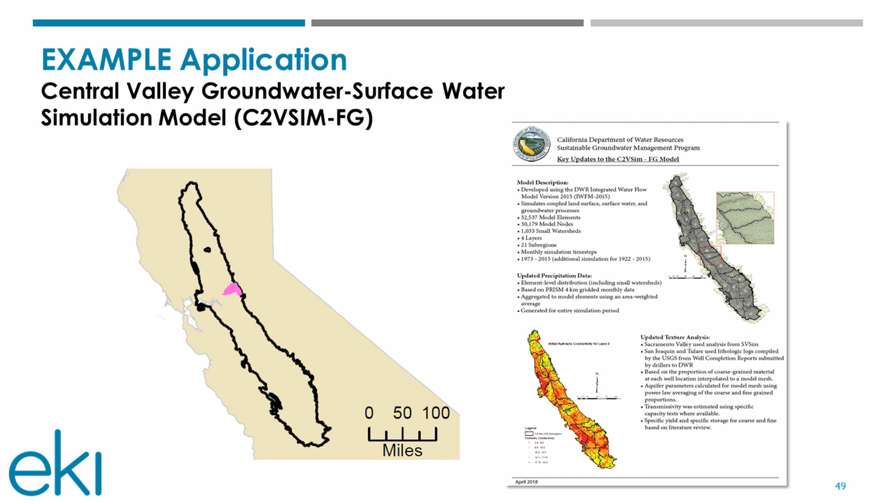Well, this is just to get the point across. Exact same area, but this is the Central Valley hydrologic model that the USGS developed, and so they based it on the texture, like we were talking about. Whereas the C2VSim, they're doing it a different way of extrapolating information across areas, a different way of interpolating.

Now, theoretically, if both models are giving you the exact same answer, even though you might have these subtle differences at a low level of detail, when they're looked at in a larger sense, they're giving you the same answer. They're compensating for any differences.

And so, say, for example, I want to use one of these existing models. You could take the C2VSim and the CVHM and start going through this whole process. How do they distribute aquifer parameters? How does the model perform? Like we were talking about, uncertainty. And you can say, well, for us, this one works a lot better than this. Whereas if you were in a different basin, you may come up with the exact opposite answer.

But in the extreme, they're coming up with very similar results when they're interested in much larger areas, regions like Sacramento Valley versus the San Joaquin Valley versus Tulare Basin and so forth.

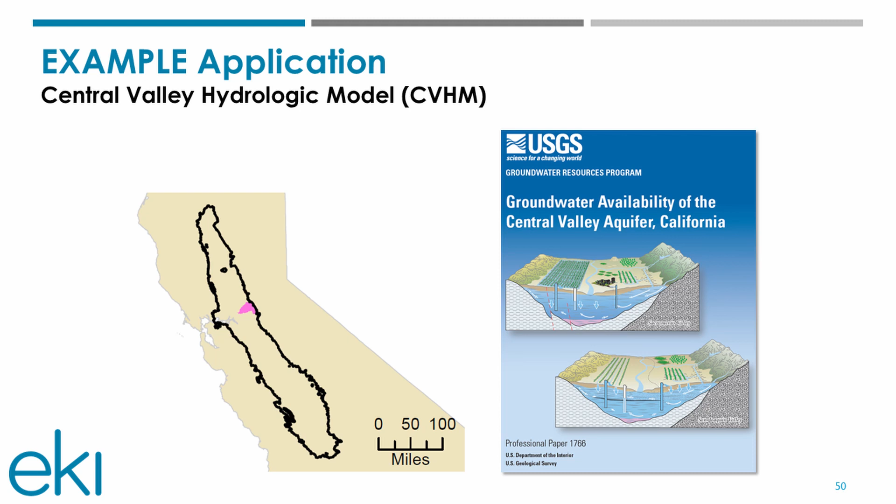participating. And then finally, this is just a quick slide to identify some of the things that DWR is looking at in terms of SGMA, and selecting a model and so forth. Like we talked about, whatever platform you use, it's got to be publicly available, has to be peer reviewed. Both of those have to be open to the public, and you have to be able to get to the software. It has to be open and available to anybody. It has to make sure that it covers your entire basin. You can't just build a model for a portion of your basin. It has to do the entire thing.

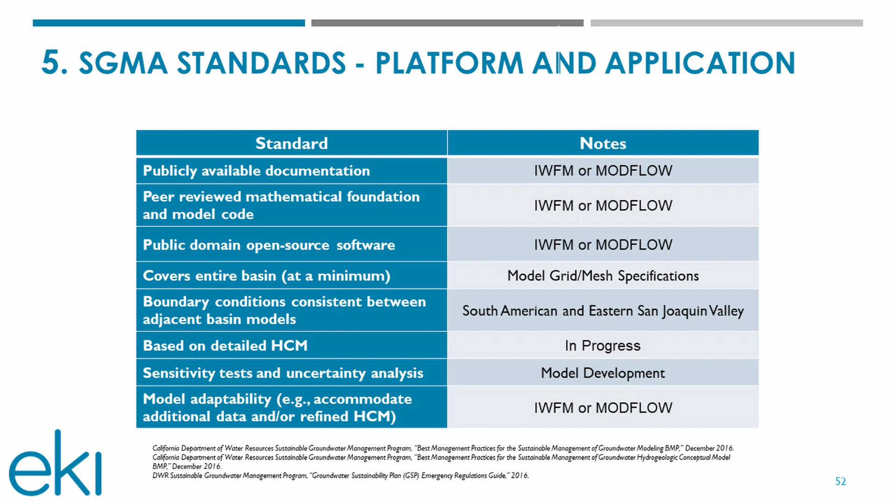And then finally, the model adaptability. Does it have the things in it that can deal with all the changes that might take place, like if you had to create a new project or something. And so I'm just going to finish up here with some of the takeaways from this lecture. Sorry to put you through this, and thank you for your patience. But basically, the key points were to remember that models are built to support you. They don't make the decisions for you. You have the ability to question the output from a model.

Secondly, have your expectations aligned with the amount of resources that you have available and the limitations to represent the real world in this kind of way. No model is perfect. They all have a range of perfection, quote unquote, a range of accuracy, but none of them is perfect. In fact, the models are a representation of the real world system. So by definition, all models are wrong. It's just we have to figure out how wrong they might be and whether we can live with that level of error.

The models can be updated and improved over time, and that's determined by the quantity and quality of not only the data that you have when you build it originally, but how you improve that over time into the future. And they also can be improved and updated as the questions that you have to answer change over time, if they do. And then finally, the maintenance and improvement of a model is most efficient when you maximize those entities that have ownership of it, have bought into it, and rely on it for whatever purpose they may have.